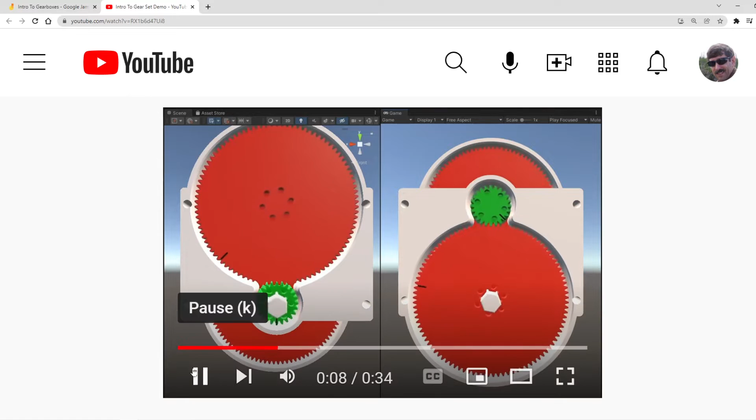Now, I want you to count how many times the green one turns until the red one goes all the way around. Should go 4 times around for the red one to go once. Let's go. 1, 2, 3, 4. That was 4 times. So that was 4 times around for that. That's a 4 to 1 gear ratio.

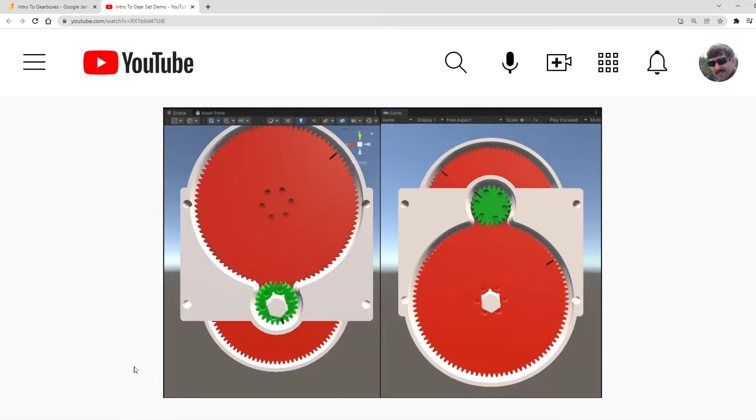Okay, now we're going to go back and count how many times this goes around until this one goes around once. These are stacked. This one will go around 16 times. Back to the beginning again. 1, 2, 3, 4, 5, 6, 7, 8, 9, 10, 11, 12, 13, 14, 15, 16. So this one turns 16 times.

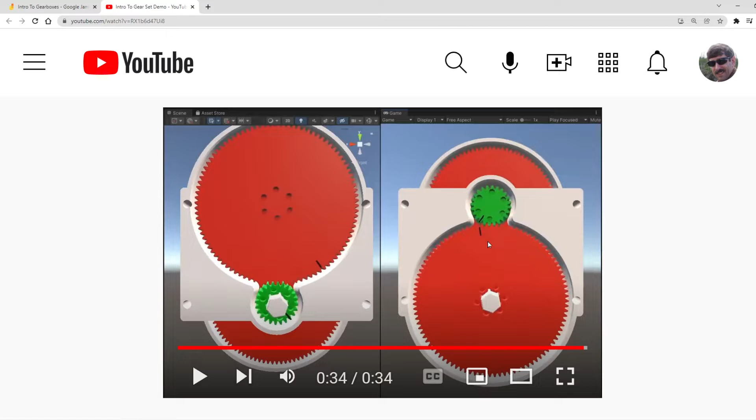This is a stacked one. These two are one set, 4 to 1, coupled with another set that's 4 to 1. 4 times 4 is 16, 16 to 1. So that's how gear sets work. That's the basics of it. Let's take a look and see. There's a little bit of terminology.

The pinion gear is the drive gear, is the gear you turn, is the input gear. Those are all the same way to talk about this little gear that we were spinning. Output gear is the driven gear, is the transfer gear, is the gear that gets turned. I'm used to mostly saying pinion and driven, but often you'll see input and output. Sometimes they'll just be numbers. You should be familiar with these terms because you see them used interchangeably.

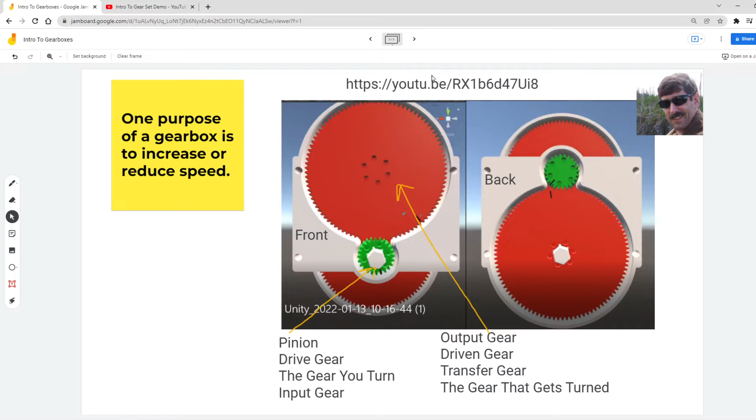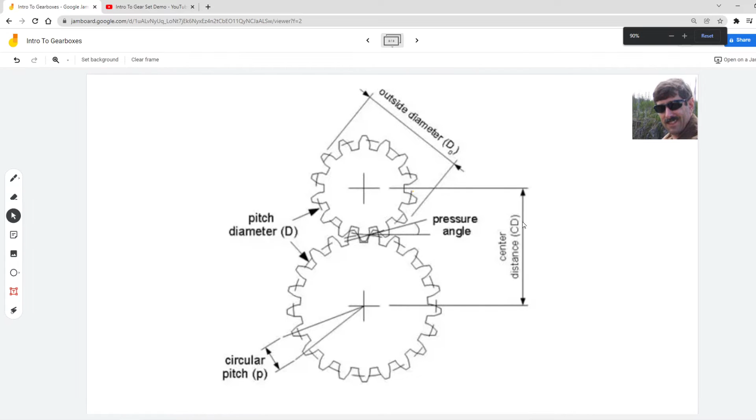Next, there are some important features of gears. The most important one is the pitch diameter. The pitch diameter of one gear plus the pitch diameter of the other gear has to equal the center distance or your gears don't work. Oh, here we go. The pitch diameter is where the two gears actually make contact. And this is a special kind of gear called an involute gear, and there's a pressure angle it makes contact at that actually drives it.

So if this is done very well, these actually roll on each other instead of slide. When they slide, it creates friction, and friction creates heat. Heat makes gears degrade or bind up or lock. So it's really important to know this pitch diameter. It's a matter of the gear design and the center distance. There are so many gears already designed, and sets you can already use, but you have to know what you're doing. You have to use two pitch diameters of the same pressure angle to figure out your center distance, because that will be a shaft and that will be a shaft.

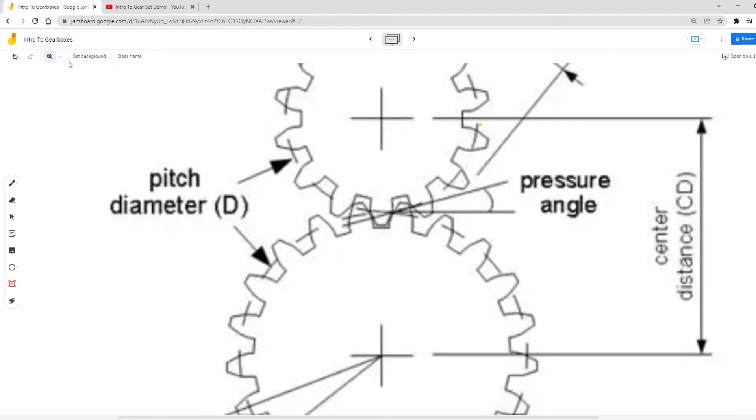And then there's something called the circular pitch, how far it is from the center of one gear tooth to the next. That tells you how many teeth there are. So the number of teeth in the driven gear divided by the number of teeth in the pinion is your gear ratio. I know that's all just a bunch of words right now. You're going to get a chance to practice and get it to sink into your bones. But I wanted you to hear those words.

Oh, and then there's also the outside diameter. That's important because the outside diameter has to be sized so it doesn't bottom out in this root. Often you'll see bearings on the shaft. In the design that we're going to use, the outside diameter of the gear is actually the bearing surface, the surface that it rides on. It's what holds it in place. That is done in industry. And so you have to know the outside diameter. So that is your intro to gearboxes.